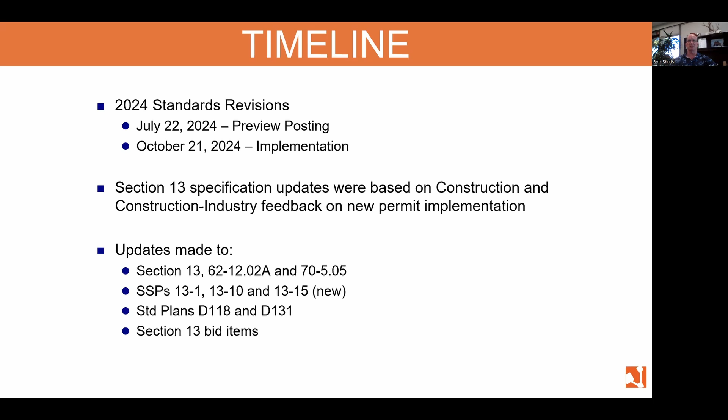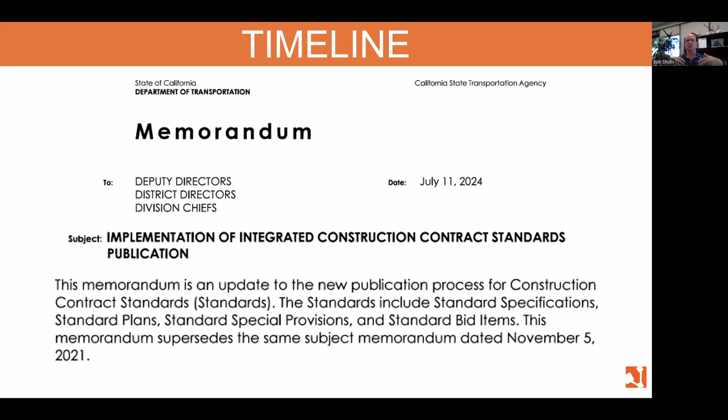So this is the memorandum that went out in April of 2023 that stated that as of July of 2023, there was a new spec, and that's what came out in July of last year. There was also a memorandum that came out in July of this year to state that Caltrans is now changing how they integrate their construction standards publications.

Essentially stating these new items, which is that from this point on, standards, including standard specs, special provisions, standard plans, and bid items, are now posted annually in October of each year. Previously, there were semi-annual updates, now it's annually. So in October of each year is when spec changes are going to come out.

Mid-cycle updates could be posted in April, including SSPs, plans, and bid items, but they can't change the standard specs. And then anything beyond that is what, and Allison could unmute and tell me if I'm wrong, but that's considered a non-standard special provision, NSSP, which are project-specific specifications that have to have owner review and approval.

So if there's something major on a certain project or some major item that comes up, there is the opportunity to do an NSSP, but they don't take those lightly. It's not something that's easy to get done, but that's to deal with some other issue that has to be done less frequently than semi-annual.

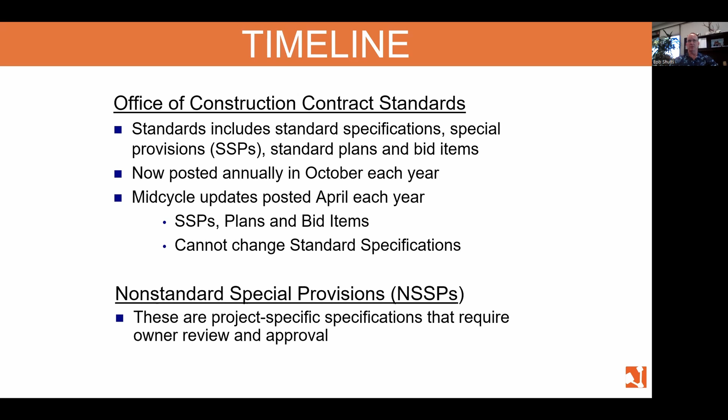So the 2023 standards are currently in effect as of right now, but as of October 21st of this year, there's new standard specs or standards that are coming out.

They're currently available for preview right now. The 2024 SSPs can be used immediately as NSSPs with owner approval if there was something needed to come out sooner.

Mid-cycle, this kind of gives you an idea of how the process works. So mid-cycle revisions are due in January if you wanted something to come out in April. For something that's going to come out in October 2025, the due dates are not posted yet, but they're likely around April.

So the standard is if we found something in these specs that come out this October, and we felt like, oh, this needs to change for next year, really that process needs to start immediately.

And by April, really the horse is in the barn. From April to October is approvals and other things happening behind the scenes, but there aren't a lot of changes to those standard specs between April and October when they actually come out and become official. I think that's a fair statement, but again, Allison can let us know if that's off base.

Yeah, do you mind if I chime in on that? Yes, please do. Please do. I just wanted to start off...

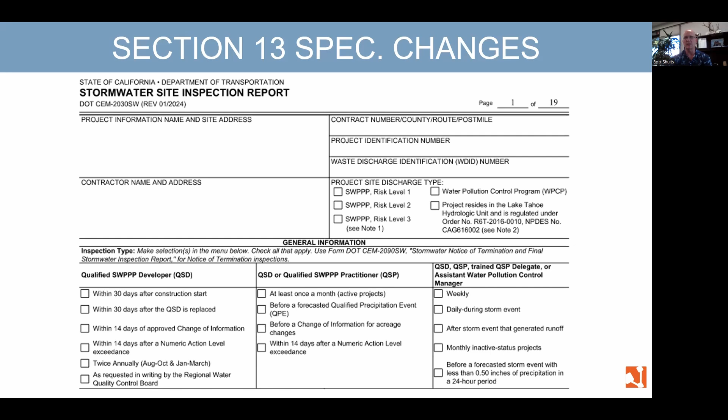The one thing I wanted to point out that I think we need to adjust is that before a forecasted storm event with less than 50%, 0.5 inches of precipitation in 24 hours, this language would only be applicable to pre-storm event water pollution control programs or inactive status projects.

So where you could have a delegate or someone else do it as well. Okay.

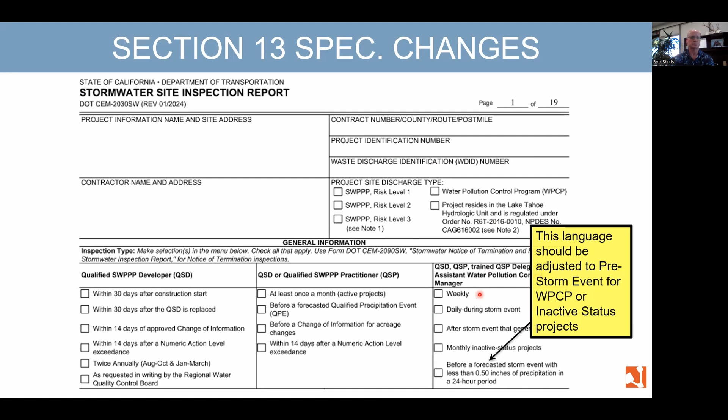So there's also another one of the changes. We removed the language for the Lake Tahoe hydrologic unit. It was kind of mixed in throughout section 13. All the Lake Tahoe hydrologic unit stuff has been pretty well pulled out, and it'll be part of an SSP for a project that's in the Lake Tahoe hydrologic unit, that'll be 13-15. Right now I believe it says reserved, and it would only be part of the project if you're dealing with Lake Tahoe hydrologic unit. So that is cleaned up. Allison, is that a fair statement? Then that's what the intent is for Lake Tahoe hydrologic unit, we're pulling that out for those specific jobs.

Revised roles and... Allison, sorry, you were muted. Sorry, no, yes, you're right. Okay, thanks. Okay, good. Revised roles and responsibilities.

The other thing that the 2023 spec change mentioned is the water pollution control program roles and the QSP delegate versus water pollution control manager. There was an unintended consequence with the way the language was, where it started using QSP delegate because that came out in the 2022 CGP. And it made it, if you read it the way it was written, you could potentially not have to have the 8-hour water pollution control manager training to be an assistant water pollution control manager.

So this language has been cleaned up. Before assigning an assistant water pollution control manager, they got rid of QSP delegate there. The water pollution control manager must ensure that the assistant water pollution control manager has competent understanding of the following water pollution control work, which is the old language. Then the assistant water pollution control manager must record and report issues to QSP within 24 hours. The assistant water pollution control manager must follow the QSP delegate requirements detailed in the permit. So you have to be both.

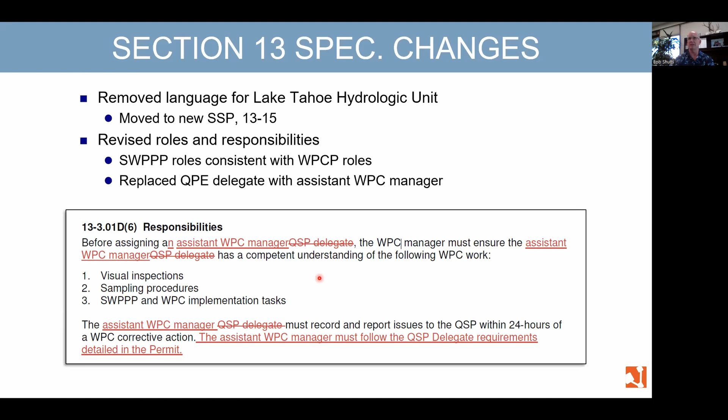Just to clarify that, in 13-1.01D(4) it says: assign a water pollution control manager, assign an alternate water pollution control manager to perform responsibilities in the manager's absence. The alternate water pollution control manager must have the same qualifications. An assistant water pollution control manager may be assigned to act under the supervision of the water pollution control manager.

And this is from the CGP, where the CGP training team has outlined foundational training and site-specific training. Foundational training for all delegates is required of a QSP delegate or a water pollution control manager. One of the things I wanted to clarify was that by taking the Caltrans 8-hour water pollution control manager training, you meet the requirement for foundational training.

So if you've taken it, and you have to take it to be an assistant water pollution control manager, you meet the requirements for foundational training. You're still required to have site-specific training to meet the requirements of the 2022 CGP. So you've got to do site-specific training with your water pollution control manager, but by having the 8-hour water pollution control manager training under your belt, you've handled foundational training.

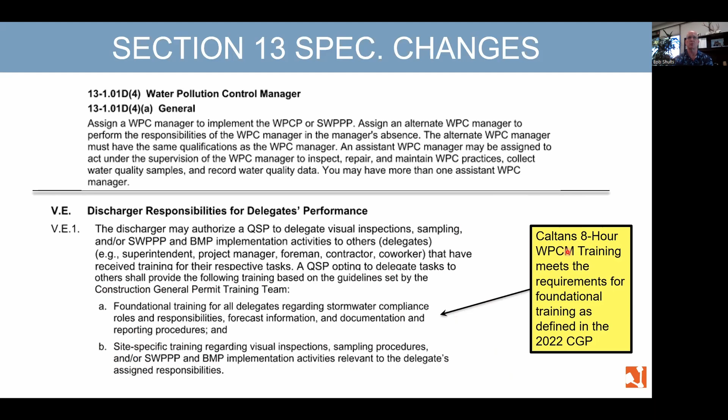Just so everyone's clear, this is kind of a matrix of what it takes to be what it takes on a Caltrans project. Obviously we have the QSD course, QSD, which is CASQA or the state of California, not Caltrans - a 3-day class, pass the QSD exam, you have to maintain an underlying credential. A QSP has to take a 2-day class, pass the QSP exam, maintain an underlying credential.

A water pollution control manager, which is a Caltrans designation - you have to be a QSD or QSP, either one of these. You have to take the 8-hour training, and you also have to have Title 22 hazardous waste training. This comes up in Section 14 of the Caltrans specifications, where they talk about having to have Title 22 knowledge as a water pollution control manager. If you have questions about that, you can ask at the end or send me an email directly.

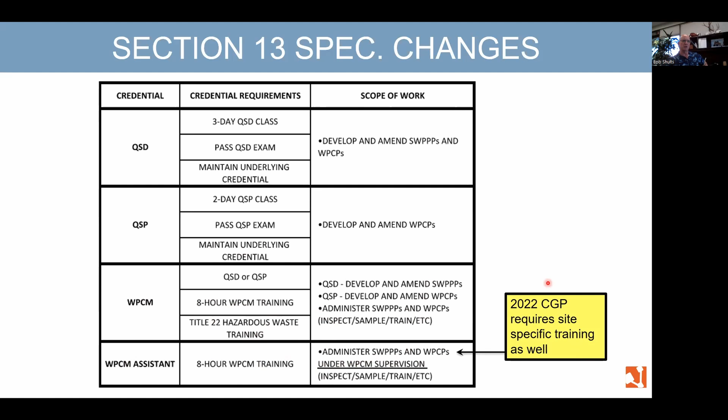And then the assistant water pollution control manager has to take the 8-hour water pollution control manager training only, and that allows you to work under the water pollution control manager. It also would require, though, on top of that, in order to meet the requirements, you also have to meet the requirements of QSP delegate now, based on that language I just showed you, which means you would also have to have site-specific training that's documented.

Other changes of Section 13 allow for electronic submittals and storage of plans, which is great. In order to get there, CGP requires printed SWPPP maps on site. Water pollution control program mimics the SWPPP, so you have to retain a current copy of the authorized SWPPP or water pollution control program at the job site. Maps must be printed full size. The remainder of the water pollution control program or SWPPP may be in electronic format. That's straight out of the CGP, essentially stating you can go electronic except for the site maps.

There's also adjusted language here that you can submit your SWPPP within 15 days of contract approval, the intent being that it can be submitted electronically.

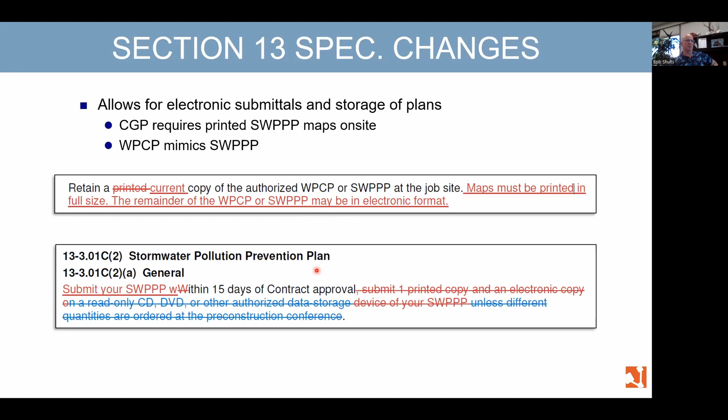Section 13.2 reformatted the water pollution control program content list to match the SWPPP list, so more semantics than anything else. Now the water pollution control program content list matches the SWPPP. We now say the notification requirement is 32 hours prior to a dewatering discharge, which mimics the SWPPP.

Section 13.3 clarified non-visible pollutant sampling requirements, which I'll get into on the next slide. It's now triggered by triggering events, not a storm event.

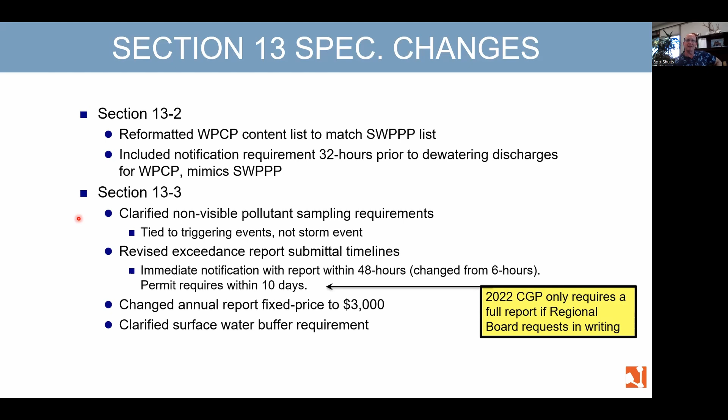They changed the annual report fixed price to $3,000 and clarified surface water buffer requirements. In the next couple slides, we'll talk about that.

The surface water buffer is a 50-foot undisturbed natural buffer from edge of disturbed soil to receiving top of bank, total maximum daily load. I believe these were in the 2022 version, but it now includes sediment load calculations for the surface water buffer when required by the permit: calculate sediment load of the surface water buffer and equivalent sediment load reductions achieved within the 50-foot undisturbed buffer, and it can be maintained using RUSLE2 or other required methods. I wanted to clarify that, and that is now in Section 13.3.

As far as water quality sampling goes, it's during an observed non-visible pollutant triggering condition now instead of a storm event. For each non-visible pollutant source, take a corresponding uncontaminated control sample during a storm event, checking turbidity, pH, and other constituents.

Collect samples for each 24-hour period of a storm event. Non-visible pollutant sampling can end before the end of the storm event if corrective actions are completed prior to further discharge of the pollutant. These are all endeavoring to get caught up with the CGP and make sure that's clear.

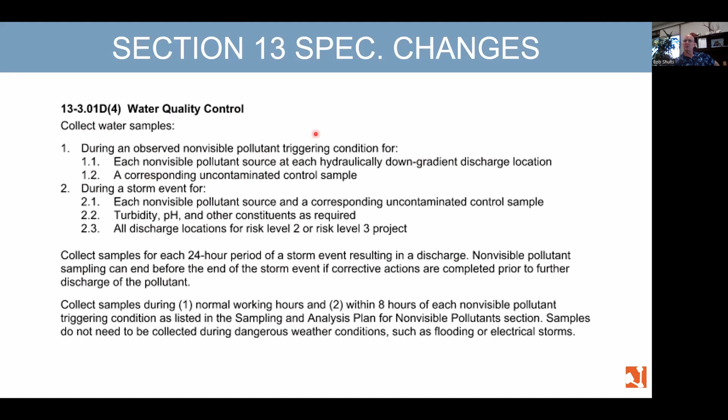In Section 13.4, illegal connection and illicit discharge detection reporting was updated to match the Caltrans NPDES permit. Minor, but included in there.

There were some ATS requirements updated for lab results, adding a notification requirement of 48 hours prior to starting an ATS operation to Caltrans. Again, dotting I's and crossing T's: concrete washout fill restrictions changed from 6 inches below the rim to 75% of capacity to match the BMP handbooks.

They incorporated a new water quality rain event definition to replace the previous storm event section, 13.11. Section 13.11 on water quality monitoring includes specifications for monitoring water quality and applies if a bid item for a water quality monitoring report or annual water quality report is shown in the bid list. A water quality rain event is a storm that produces, or is forecast to produce, at least 1/10 of an inch of precipitation within 24 hours. This is not intended to be associated with the CGP; it's for other in-water work like 401, 402 permits, 1602s, etc. That's the intent of the water quality rain event.

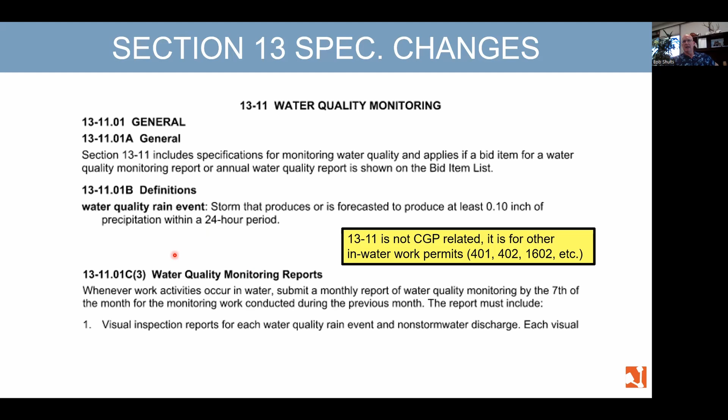Visual inspection reports are required for each water quality rain event and non-stormwater discharge — those are all visual. That's where we're at with the water quality monitoring updates, again meant to address in-water work permits rather than mimic the CGP.

The SSP 1315, I mentioned this previously, introduces appropriate changes for the Lake Tahoe CGP projects. It replaces the storm event definition, adds REAPs because REAPs are still included in Lake Tahoe permits, and replaces type K railing in section 1310.

So again, the Lake Tahoe SSP is specifically for projects subject to Lake Tahoe CGP, so it's to be used in place of 13-3. There's a new bid item for a Lake Tahoe stormwater pollution prevention plan, which includes unique TRPA requirements, editable based on project needs, receiving water sampling, construction windows, and TRPA permit.

So if you're not aware, working in the Tahoe Regional Planning Agency, the Lake Tahoe permit is a significant difference from the 2009 or the 2022 CGP. So if you're going to go up there, learn it, live it, understand it.

Caltrans understands that. That's the reason why they've tried to make this cleaner, and instead of interspersing Lake Tahoe items within section 13, now the primary will be a special SSP that comes out on a Lake Tahoe project to explain all the Lake Tahoe permit requirements and the issues associated with them. I think it's a great job by Caltrans to try and make this cleaner and more understandable, and understand what it takes to get it done up there and keep Tahoe blue.

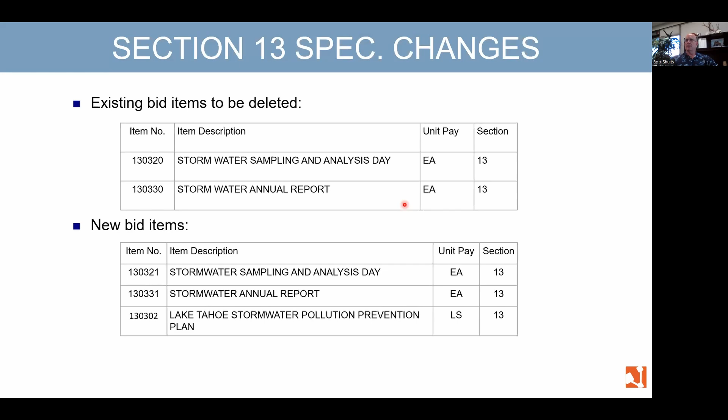Okay, I've added in the chat 4 things which are listed here. So here's the situation: I've added some items to the chat, and as I'm talking through there, I'm giving you my rationale for why I think these should be bid items. Please feel free to go in and add a thumbs up or a thumbs down. It's kind of a poll that I'm running here today, because I plan on taking this back and continuing the discussion.

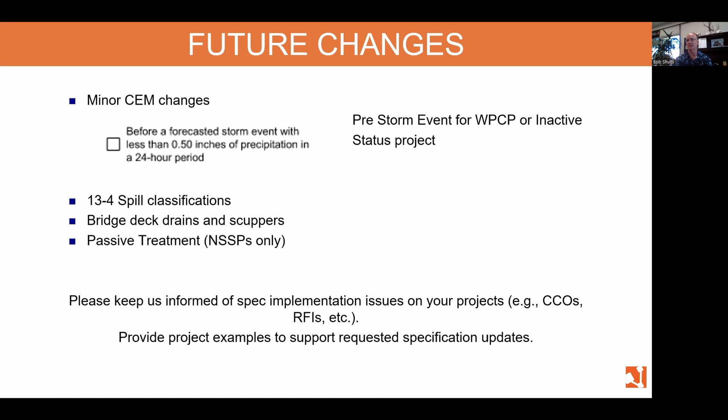Okay, we're at the question and answer stage. I don't know if John or Allison or anybody wants to get into any of that and help curate it.

All right, yeah, Allison, why don't you turn on your camera and we'll put you on the screen with Bob. All right, cool spot. Okay.

All right, thank you, Bob. Very good presentation. Yes, we do have questions. So Allison, why don't you just feed those to Bob or answer them? I see one from Amy right now.

Okay, I'm trying to. Okay, Amy, let's see. Paying for new bid items does not guarantee that the product received is of quality or accurate. Paying for REAPs in the past did not guarantee quality work.

I don't think that anything guarantees quality of work. That's the reason why you have specifications, rules and regulations. It's the reason why we have the CGP in the first place. There's no insurance policy. I guess the threat of a $1 million fine, if that isn't enough, then we're in the wrong business. It does not guarantee it, no.

The idea and the intent isn't about industry or contractors trying to make a buck. It's about trying to be fair and to incentivize people to do the work. That's kind of what my point was about the idea of having a lump sum.

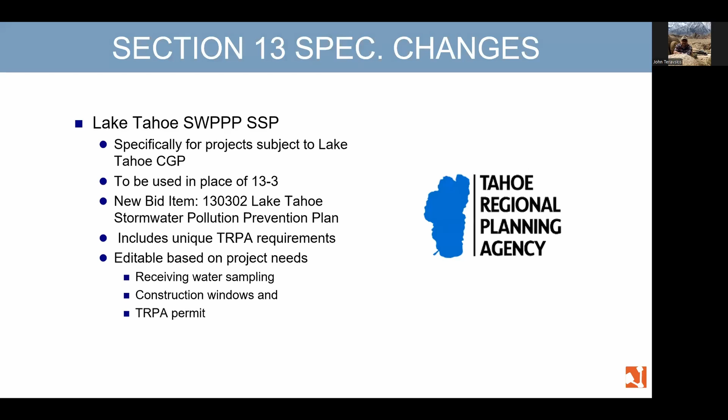The issue with RUSLE2 is there's back and forth about more guidance coming out. This is kind of an editorial comment, but what I've heard from the water board is they're expecting Caltrans to update RUSLE2, and I've heard from Caltrans that they aren't really actively working on a RUSLE2 update. So I don't know, Allison, if you know the answer to that, but I think it's a little bit hanging out there right now, an update for RUSLE2, right? I've heard from the state board that they're waiting on Caltrans, and at CASQA I have not heard that there's much going on at Caltrans on the RUSLE2 update. Is that fair to say?

Do you recommend using the Caltrans RUSLE2 or the USDA RUSLE2 for that calculation? We use the Caltrans one. The USDA one's just been updated recently, and I had to do that for a project, but luckily we had some 401 permits that made it an exemption, so I didn't have to do the RUSLE2, thank goodness. But that's one of the other approved methods - if your 401 permits cover certain things, you don't have to do the RUSLE2.

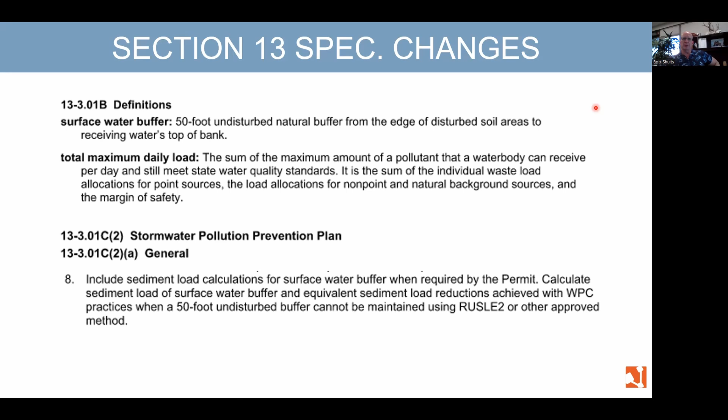So their question was again about the training. Yeah, I mean, site-specific training is a requirement. So the new specification that comes out in October now states that you basically on Caltrans projects to be a delegate, to be a person who's working under the water pollution control manager, the assistant water pollution control manager, the person that can do inspections that are not required by our QSD or P.

For weeklies, daily during storms, after storm event, those kind of things, they need to be an assistant water pollution control manager. And that also says you have to be both. You have to be an assistant water pollution control manager, which essentially is taking the 8-hour class. And you also have to meet the QSP delegate requirements, which is twofold to be a QSP delegate. You have to have foundational training and you have to have site-specific training.

So again, I'm for more rather than less. As far as bid items go, but people could say, well, that's only a one-time thing, so you ought to be able to include that. That's one of those.